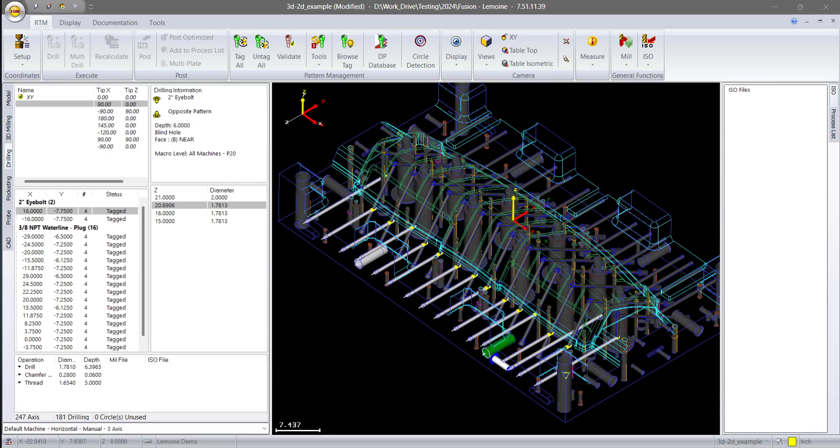So in most cases for safety, it's a good idea to have a look at your model to make sure that there's nothing in the model that's going to cause us any problems, that there's nothing running into any water lines that'll make a sprinkler system for us, and nothing running into one pattern into another. So we have a couple of tools in the software that will help us out with this.

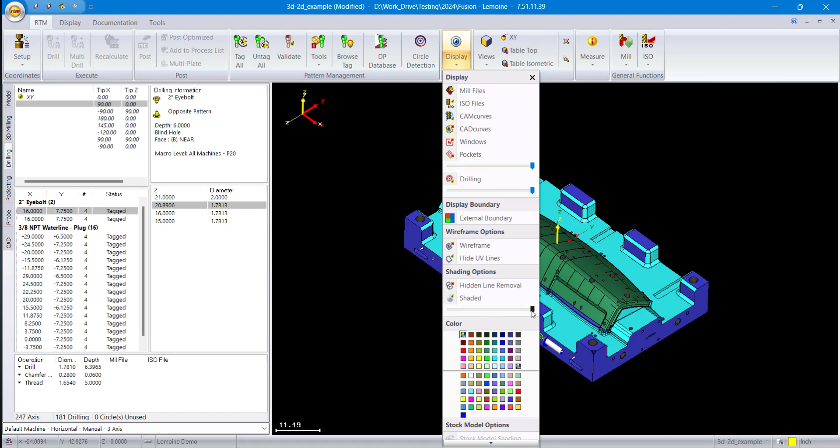I'm just going to change my shading light here, and I'm going to put my background back to white just to make things a little bit easier to see.

So if I come up to our tools, the first tool that I'm going to use today is the one that we call Drill to Drill. Basically, of all the patterns inside of this model, anything that connects to a water line that's not a water line needs to be detected. So when I do that, I'll tell it I don't want any other types of drilled holes within a 1/4 inch of any water line inside of the job.

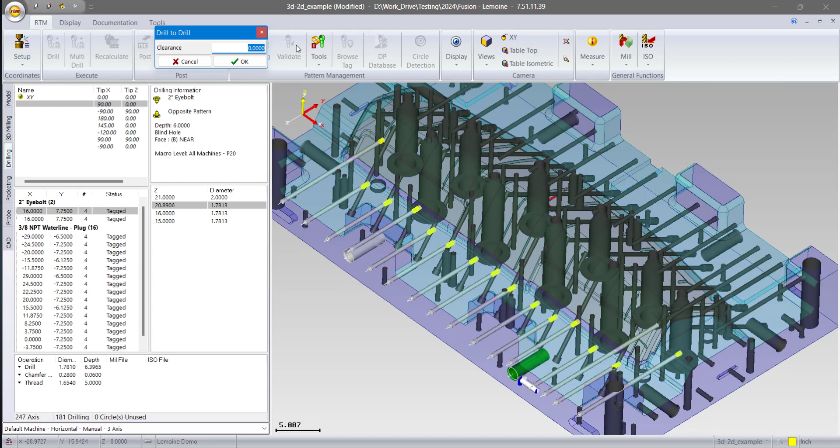I say okay, and the first thing it does is come back and say, yeah, there's definitely some problems here. My display is not quite showing it the way that I would like. One sec, I'll just turn the shading back off, and we'll go back.

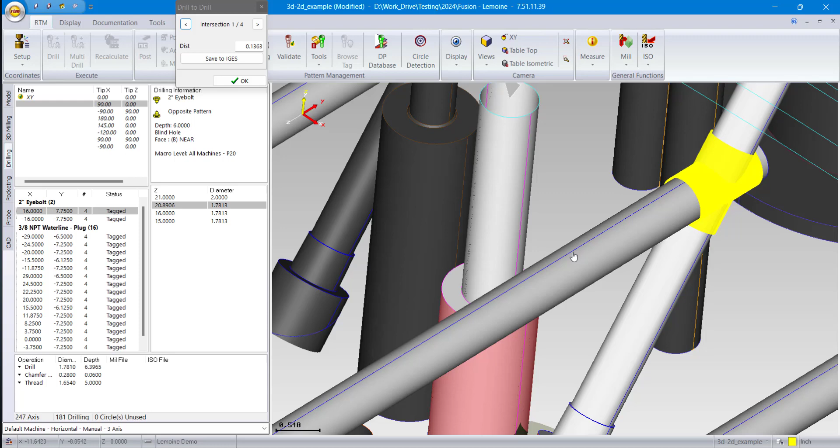So here you can see that we've taken the actual water line and ballooned it out by a 1/4 inch, and we tend to sweep the radius around the end, which will help us a little bit. I can see that this other counterbore is interfering with this one, but it's closer than my 1/4 inch, not really causing a problem.

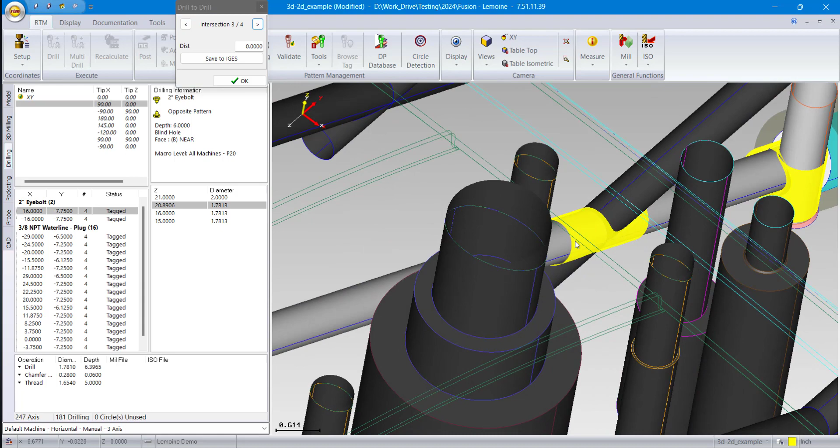I go to the second one, I have the same situation. Third one, here we can see that screw hole that really intersects the water line badly. This would be enough, I think there's one more of these in here. Yeah, so there's one more of the same right here.

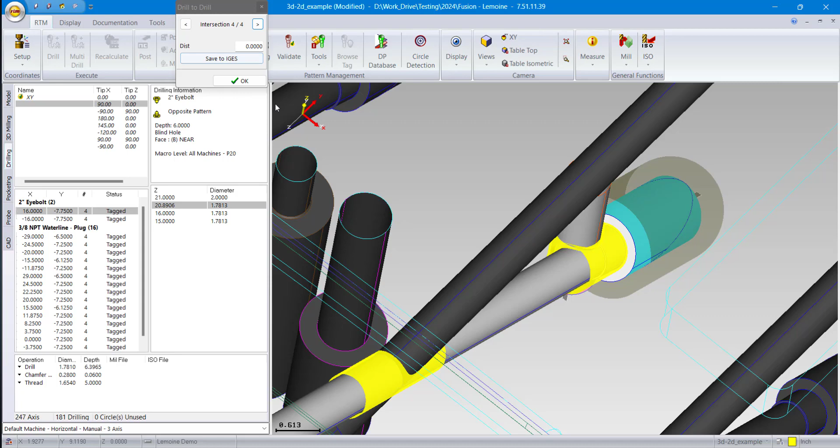What we would probably do at this point is we have a button here to save to IGES. What it'll do is show all the interferences into an IGES file. The CAD designer can load it back up, and when he imports the IGES file over top of his model, it'll show him exactly where the problems are that we found. So we'd probably send this one back to engineering to get that fixed up.

The second thing we can do is see if there's any water that's too close to the surface data. So maybe a water line is close to breaking through, and we want to be careful with that. Same with any kind of drilling. We can do this with water lines or with oil lines, and we hold them separately, since water and oil don't mix well, so we need to make sure they stay separate. So I'll use my second tool here, which is Waterline to Model.

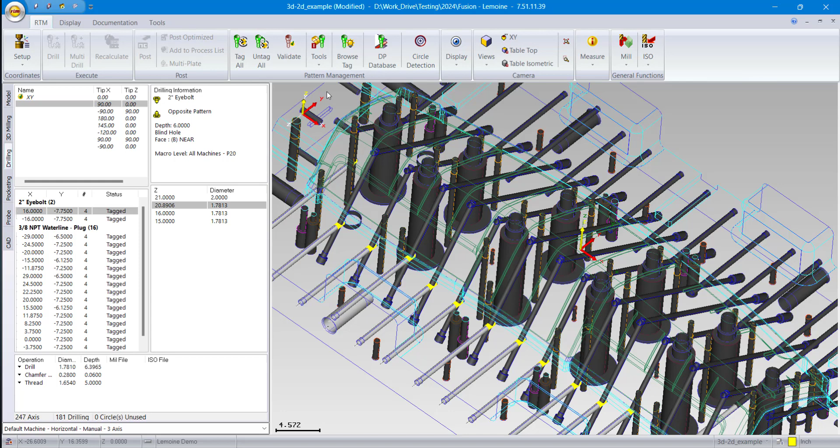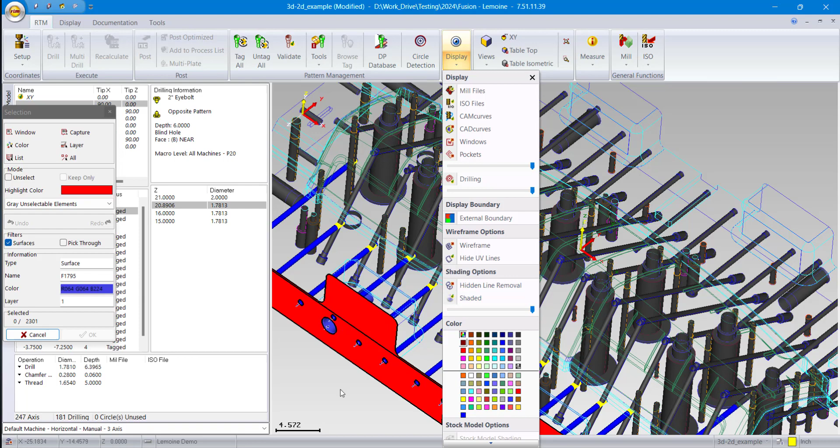For this one, I'm going to tell it 3/4 of an inch, because I'd like to stay back a little bit further from my job. What I want to compare it to, it's a little bit easier to see shaded, so I prefer that I pick the colors that I want. I want to check to that green surface, and I'd probably also like to check to this light blue surface, to make sure everything is as it should be.

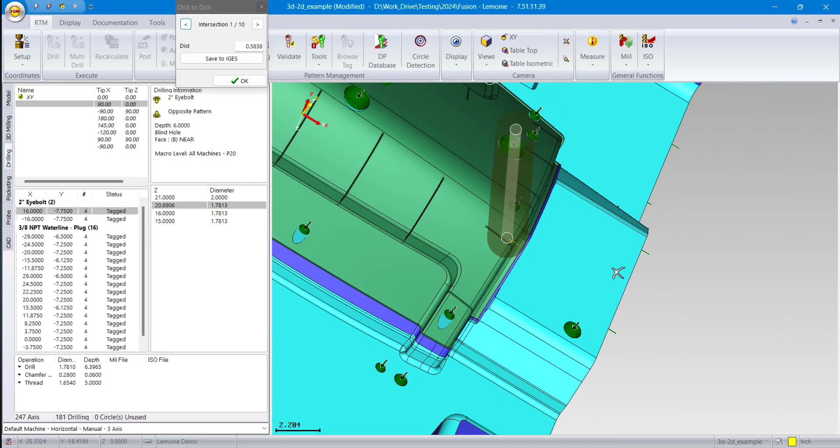It'll take a minute to do the calculation on that, and I probably need to back down my shading just a bit. But basically what you'll see is there's a water line here, and we've ballooned around it, and this little yellow leader will show me the closest surface to it, and this will show me the distance to it.

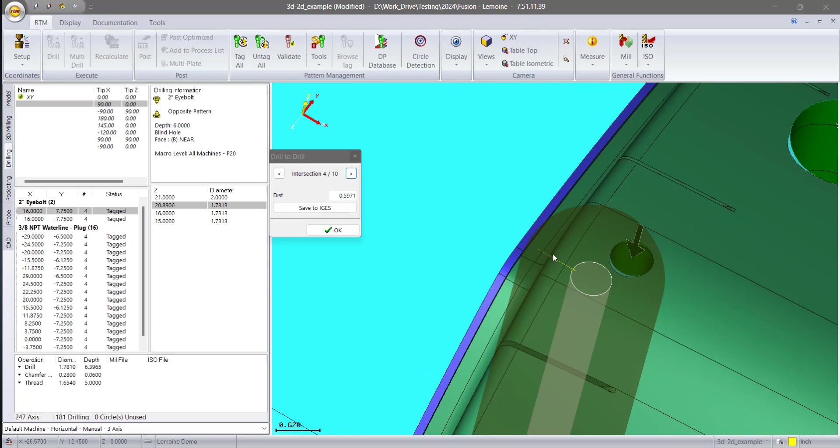So I can just toggle through these and see if there's any in here that cause me any concern. This is a very common problem in design — they don't always have good tools to determine if all the water lines have been drawn correctly. Most of these are harmless, right? So this one here looks like it's a little bit close to that corner radius, but we're still 1/2 inch away, which is fine. Same thing here. We just go through the 10 of these and we're happy.

Same thing — if we need to send it to the CAD department to get it fixed, we would just simply make an IGES file on that button and send it off.